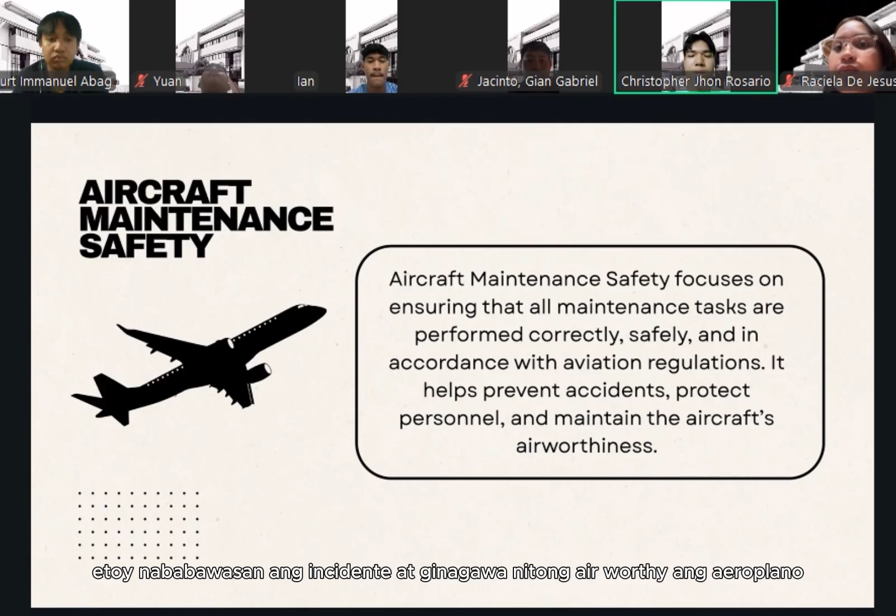For the importance of maintenance safety: it is important for several reasons. One, it protects us, the technicians. Proper safety practices help us avoid injuries from chemicals, sharp tools, or heavy equipment.

The second reason, it keeps the aircraft airworthy. If we maintain the aircraft safety, all components will function properly and reliably. Third, good safety practices help reduce human error. Following clear procedures makes it less likely for us to make mistakes that could affect flight operations.

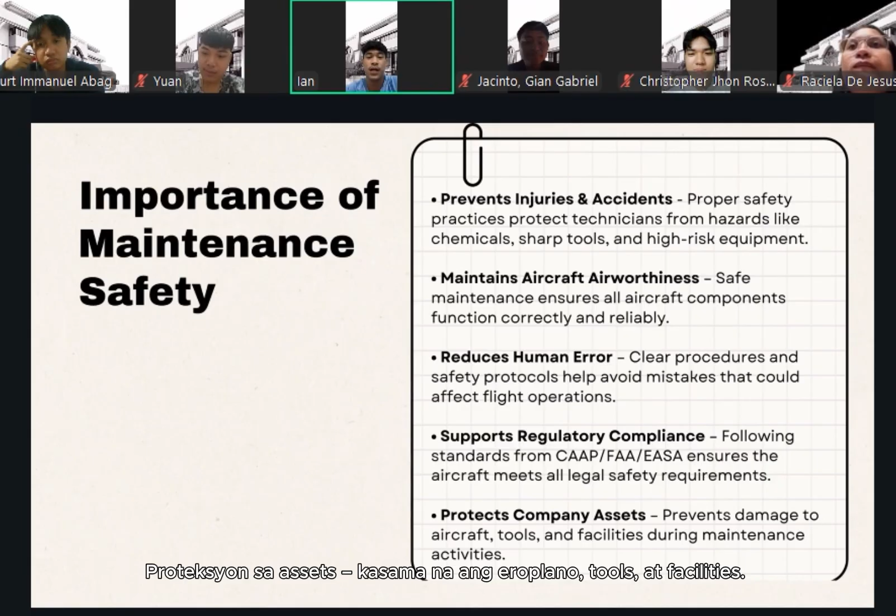Four, it ensures we follow regulations, whether CAAP, FAA, or EASA. Compliance is part of keeping the aircraft legal and safe. And last, safety protects company assets: the aircraft, the tools, and the facilities.

For key safety principles: Number 1, follow approved manuals. Always use AMM, SRM, IPC, and other official documents to avoid improper repairs. Number 2, use proper PPE.

Gloves, goggles, hearing protection, safety shoes, and respirators reduce exposure to hazards, which is familiar to us since some are used for laboratories. Number 3 is good housekeeping. Clean and organized work areas prevent slips, falls, tool misplacement, and FOD.

Number 4, hazard identification and risk assessment. Check surroundings for unsafe conditions and evaluate risk before starting work. Number 5, human factor awareness. Manage fatigue, stress, poor communication, and distraction to avoid errors.

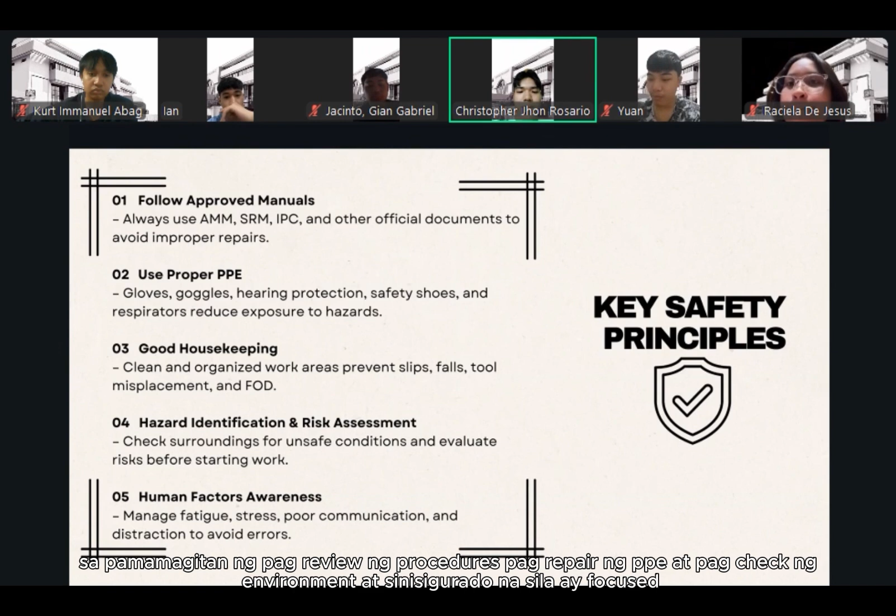A real-life example: before a system inspection, technicians apply these principles by reviewing the procedures, preparing PPE, checking the environment, and making sure they are focused.

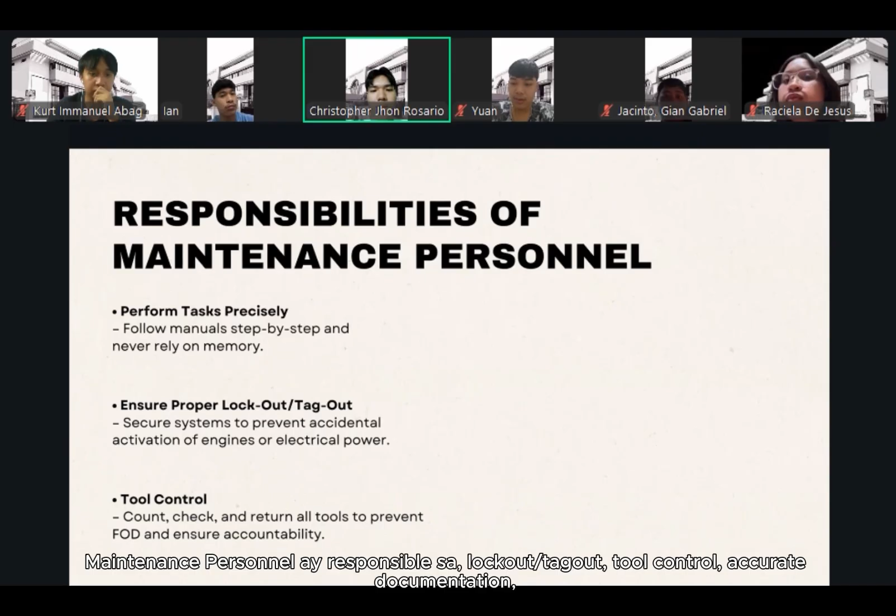This one is responsibilities of maintenance personnel. As you can see in the slides, maintenance personnel are responsible for lockout, tag out, tool control, accurate documentation, clear communication, airworthiness verification, and following manuals step by step. These responsibilities ensure safe and reliable maintenance work.

When performing a task, technicians apply these responsibilities by checking their tools before and after work and by coordinating with their team before starting and during procedures.

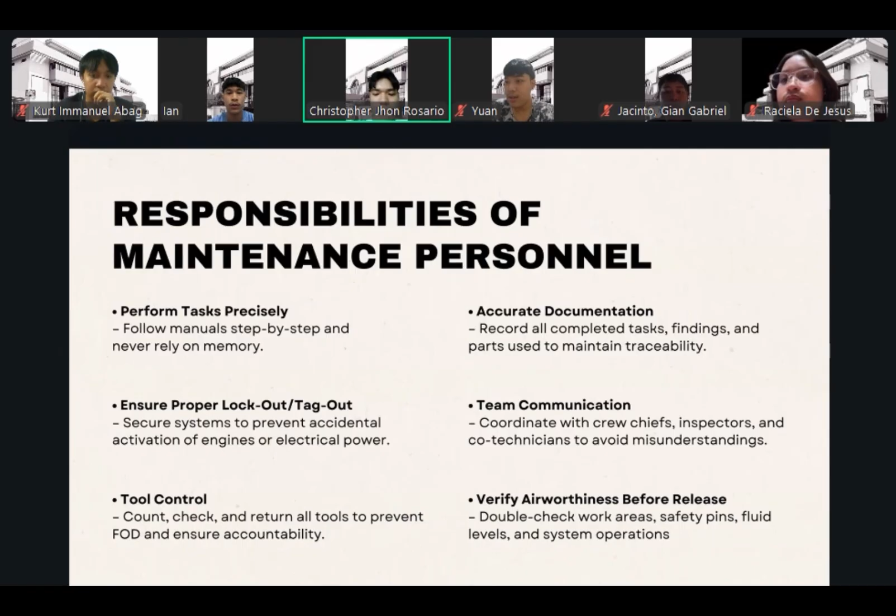The 5S method helps us keep the workplace clean and organized. It stands for sort, set in order, shine, standardize, sustain. Sort is removing unnecessary items, while set in order is arranging tools so they are easy to find.

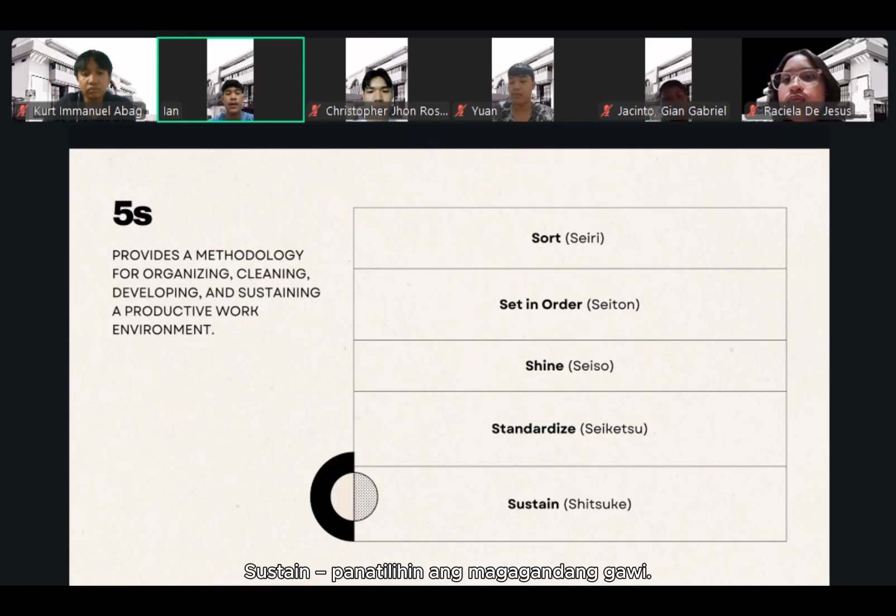Shine is keeping the work area clean and neat. For standardize, creating routines and checklists. And for sustain, making the good habits stick and maintaining them.

Dirty dozen: the dirty dozen are the 12 human factors that cause errors - fatigue, distraction, pressure, lack of communication, and more. Basically, these are all the reasons why people make mistakes. Technicians apply human factors awareness by acknowledging when they need assistance, communicating clearly, and ensuring they are mentally prepared before working.

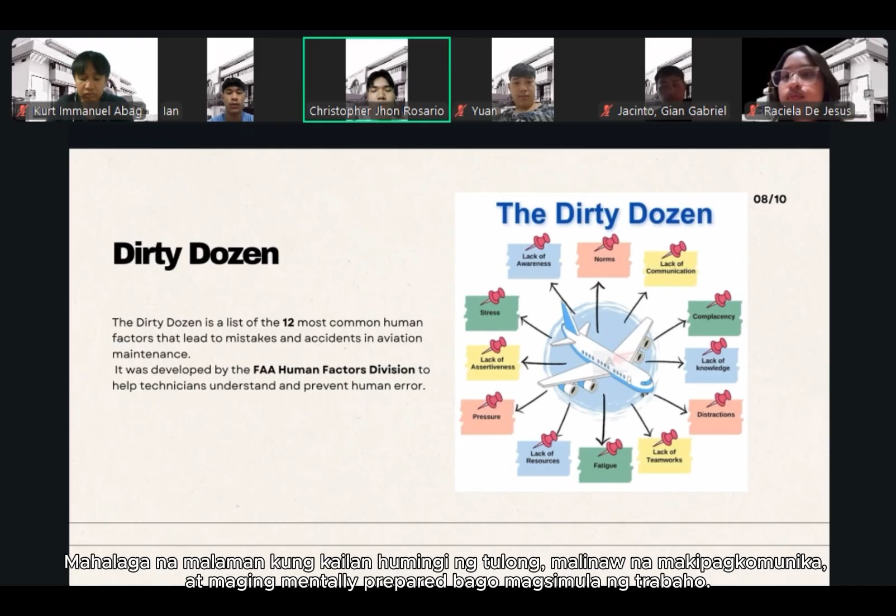Additional maintenance safety practices: safety in working with ground support equipment or GSE. When working with GSE, safety is extremely important. We always start by inspecting the equipment, ladder stacks, and platforms before using them.

Make sure wheel chocks and parking brakes are applied. Hand signals and communication are being used, and never exceed load limits on lifts or platforms. Always secure aircraft doors and panels before positioning any equipment.

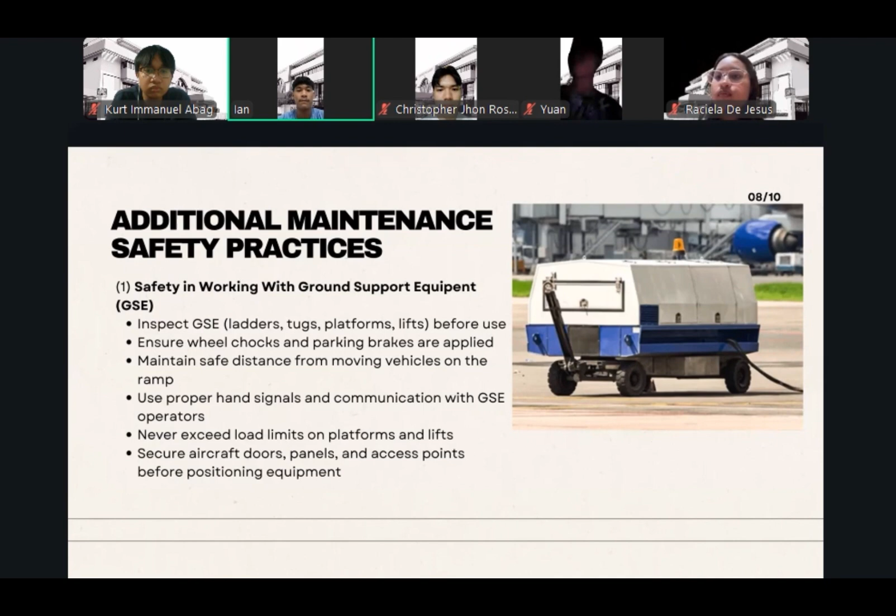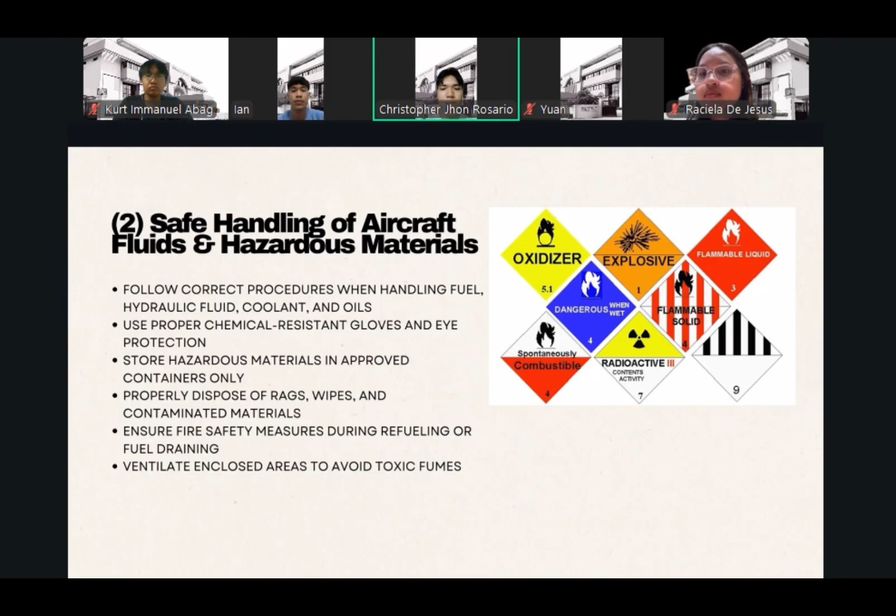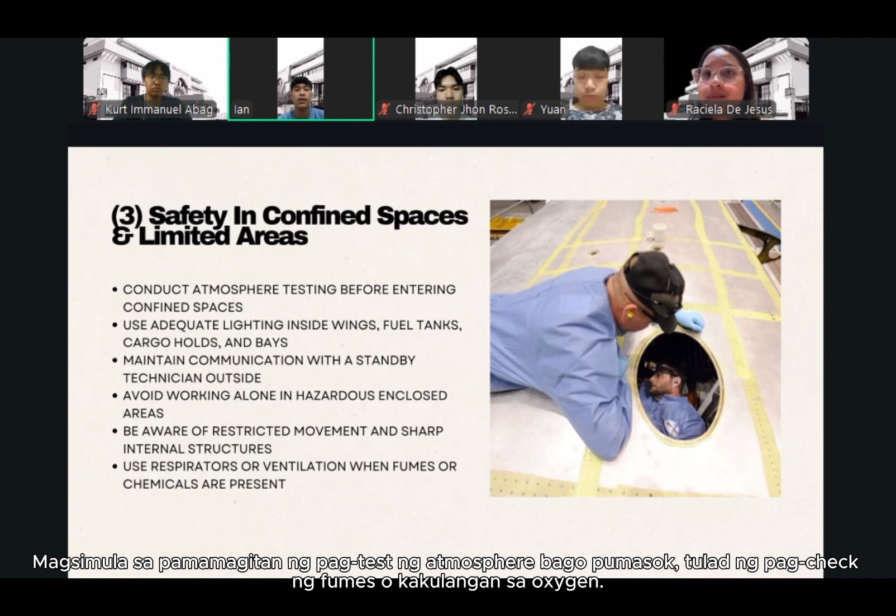Safety in confined spaces and limited areas. Confined spaces also require strict safety steps. We begin by testing the atmosphere before entering, like checking for fumes or lack of oxygen.

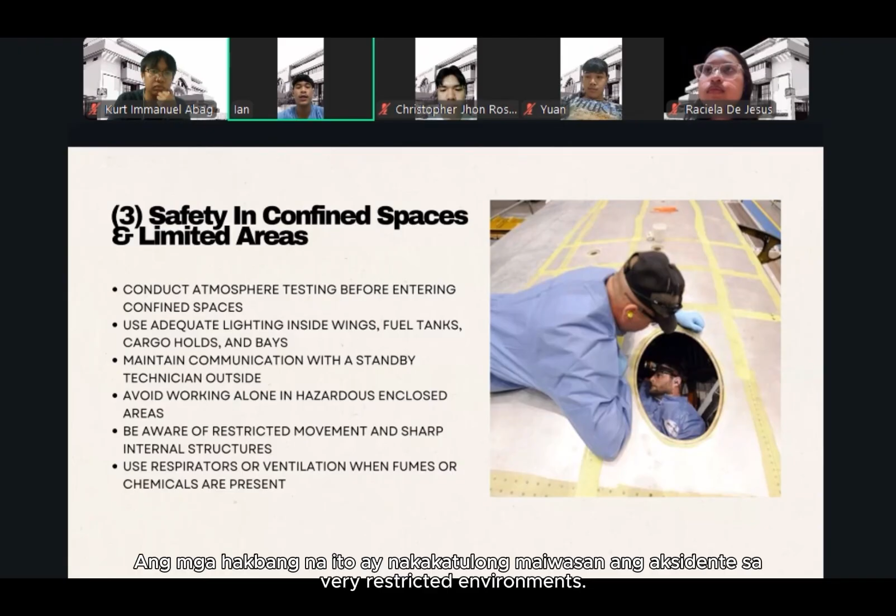We also need to use adequate lighting inside tanks, wings, or cargo bays. Always maintain communication with someone outside. Never work alone in hazardous areas. Be aware of limited movement and any sharp internal structures. And if there are fumes or chemicals, use ventilation or respirators. These steps help prevent accidents in very restricted environments.

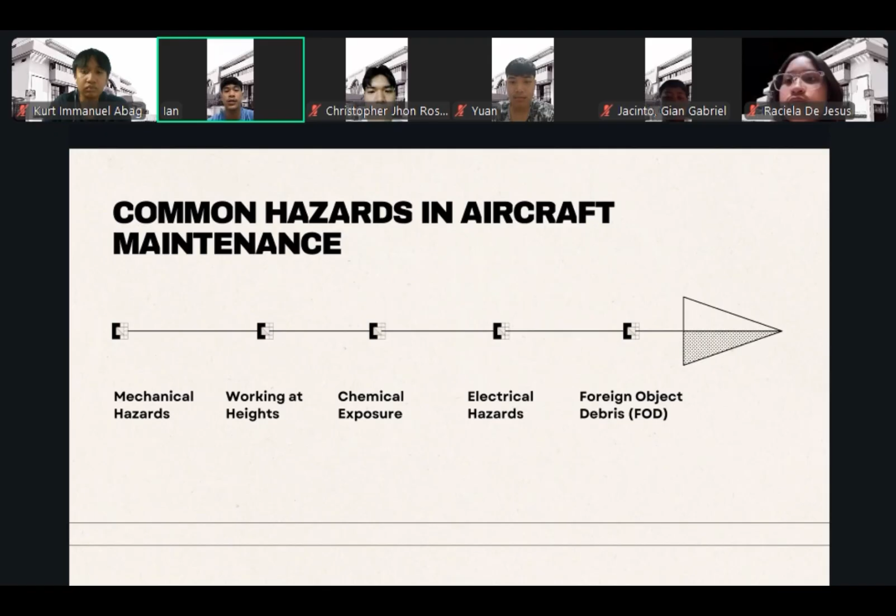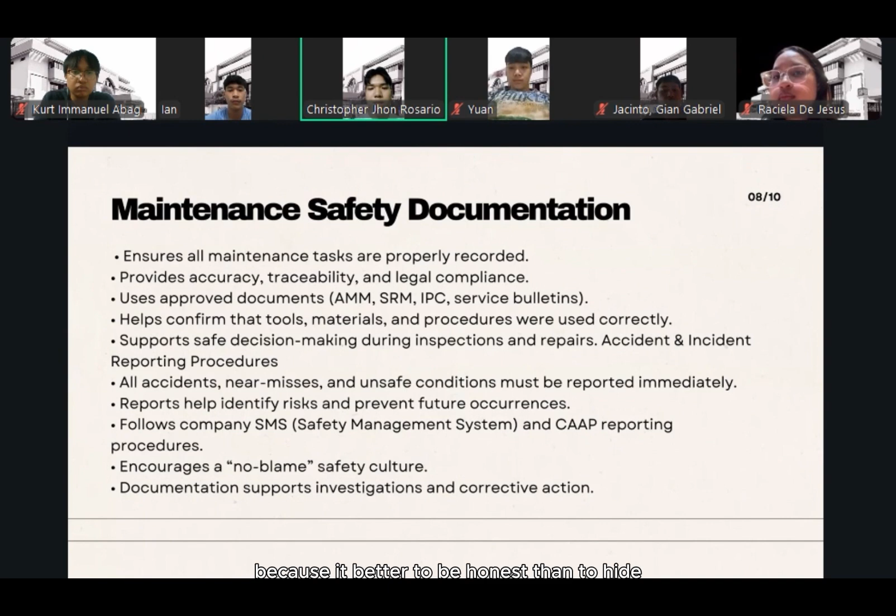For this part of our reporting, we invited someone who truly lives the world of aircraft maintenance. He is a technician with real hands-on experience working with actual aircraft, real systems, and real challenges. A person who understands safety, precision, and discipline through everyday practice.